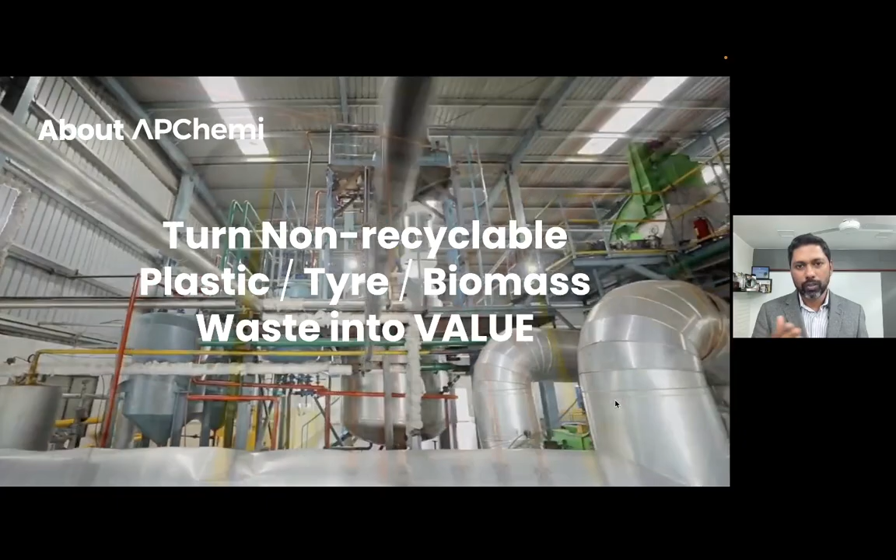About my company: we are APChemi, or Agile Process Chemicals. We are leaders in pyrolysis. We turn non-recyclable plastic, tire, and biomass waste into value. These are the visuals of the projects that we have developed and the field in which we are working. We have developed 47 pyrolysis plants since 2007 to process plastic, tire, and biomass. We are supported by Shell Petrochemicals.

We recently raised $2.4 million in collaboration with Aalborg University, Denmark, to convert plastic waste and biomass waste into green hydrogen. It's a 3-year research program that we are working on in collaboration with Aalborg University.

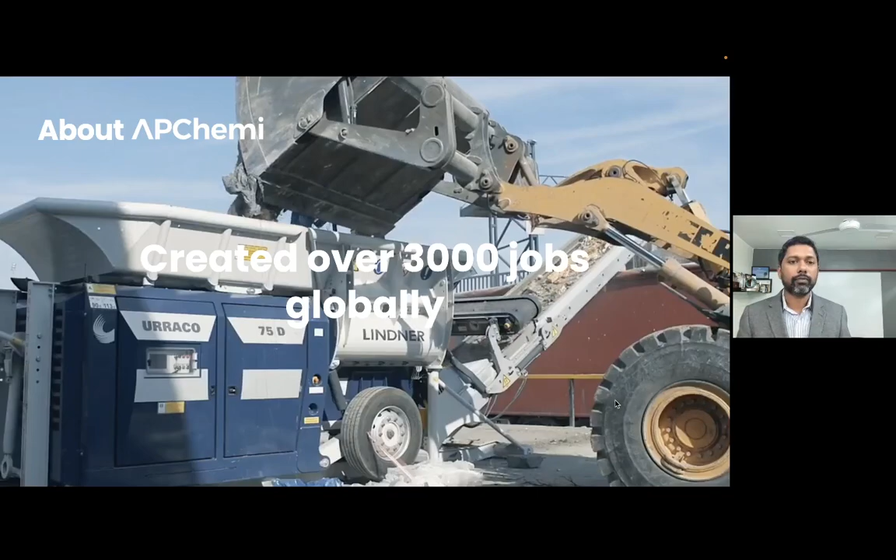We are working on global projects of converting plastic, tire, and biomass into high-value products. In Europe, we are working on a 240 metric ton per day pyrolysis plant. Recently we completed a 42 metric ton per day pyrolysis plant engineering assignment planned to be deployed in UK. Projects that we have done till now have generated over 3,000 jobs globally. Recently, we have generated over 7 proof of concepts on how you can start with this kind of end-of-life plastic waste and produce chemically recycled or advanced recycled products using this kind of technology and machinery.

We offer award-winning solutions to accelerate plastic circularity and decarbonization. We have won the Indo-Danish green hydrogen funding call for conversion of plastic into hydrogen. Our technology has been recognized as a circular disruptive technology for managing plastic waste. A couple of years ago, we won KPMG's Enrich Award for ready-to-scale startup.

We have an exceptional team. I'm very proud of my team. I have 12 years experience in this domain. Aruna heads operations with 10 years experience at Tesco as well as Maersk in operations. Sanam has experience of developing over 50 pyrolysis projects with us. We have the right set of advisors, and together as a team of 20, we have 310 years of combined experience in pyrolysis and oil purification. We are united by a common vision to engineer plastic circularity.

Our team goes beyond our in-house team. We have collaborated across the world with global corporates, academia, as well as leading platforms that are working in the domain of plastic circularity and decarbonization.

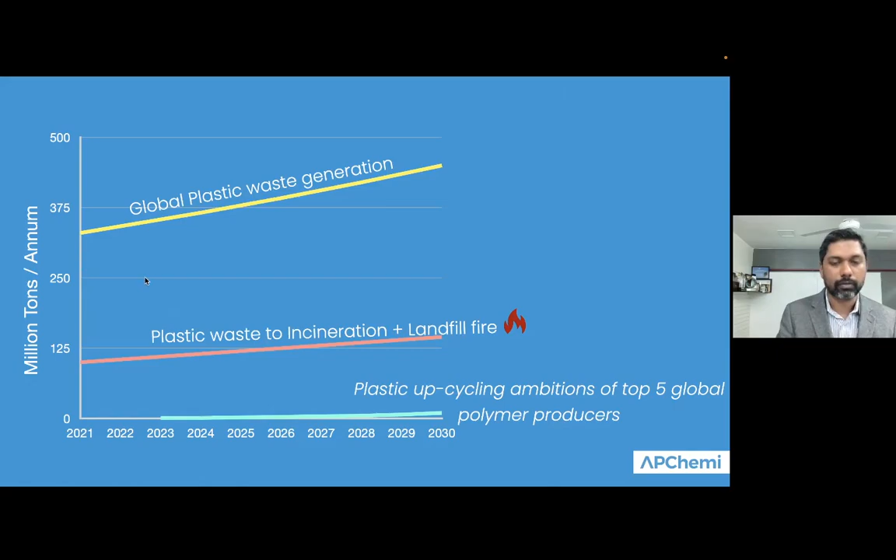Even if you take this plastic waste and convert it into plastic oil or pyrolysis oil, this pyrolysis oil has impurities, so it cannot be used back for production of polymers, and that's why there is a dependence on crude oil. So you can see this is very much a linear economy, not a circular economy.

It's not a circular economy - crude oil to polymers to FMCG to plastic dumping or burning. It's a linear economy; there's no circularity. That's because impurities in plastic waste stop the circularity of carbon in the plastic waste.

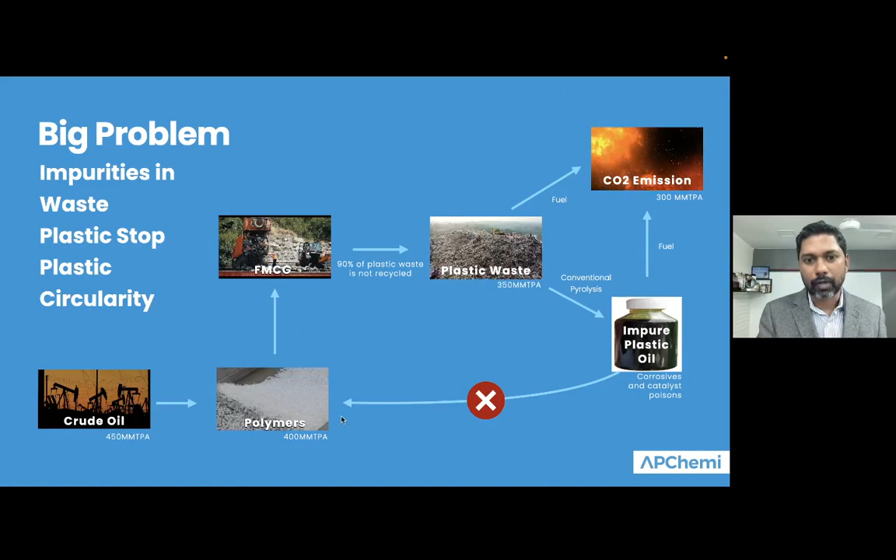The way APChemi technology solves this problem is we can convert plastic waste into purified pyrolysis oil, a PUROIL which is a very good feedstock to be blended with crude oil naphtha for production of circular polymers, which are food and pharma grade.

This is how we create plastic circularity. In addition, our separate technology also converts plastic into bitumen for road construction, capturing the carbon from plastic waste into bitumen in the road - not only capturing it into the road, but also without any microplastic pollution.

We have another technology that even if plastic is converted into contaminated oil by somebody else, we can purify that oil so it becomes pure oil and can be blended with naphtha for production of high value food and pharma grade circular plastic. This is how we upcycle end-of-life plastic waste into circular PUROIL and bitumen.

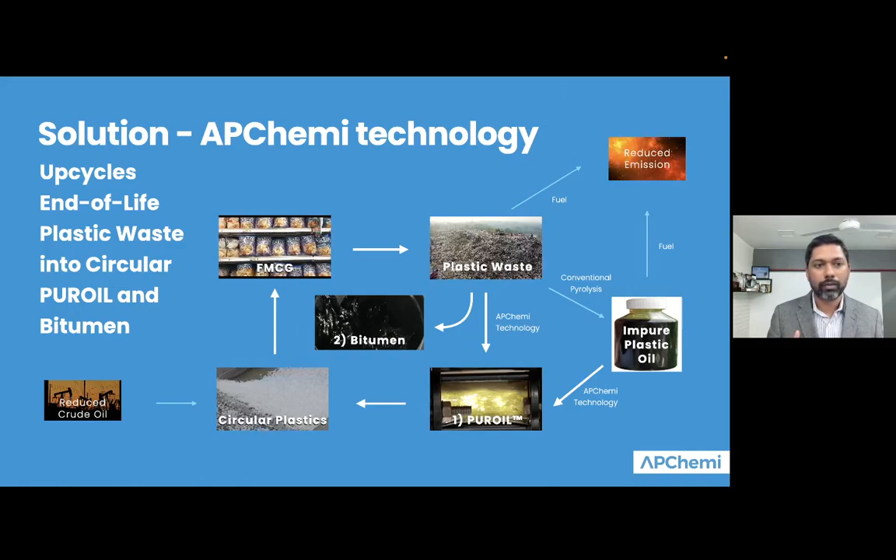Our core value is conversion of waste or impure oil into purified oil. Our pyrolysis oil purification technology has lower capex and opex, removes more impurities, and has a lesser carbon footprint compared to other technologies for purification of pyrolysis oil, like distillation, adsorbents, or hydrotreating.

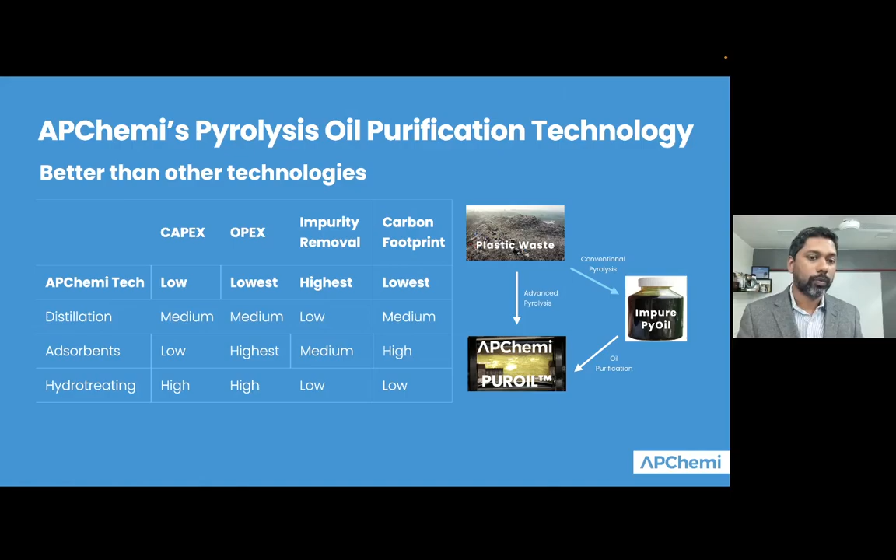Our pyrolysis oil purification technology has high purification efficiency. The core problem of impure oil or even plastic waste is chlorine impurities. Our technology removes 99.7% of chlorine impurities and very high quantities of nitrogen, bromine, fluorine, oxygen, silicon, acidic, metal, and heavy metal impurities - this is what makes our technology really usable for contaminated plastic waste.

If you have plastic waste with polyethylene terephthalate contamination, PVC contamination, even multi-layer packaging, all that can be processed through our technology for production of very good quality oil that can be used as feedstock for production of circular plastics.

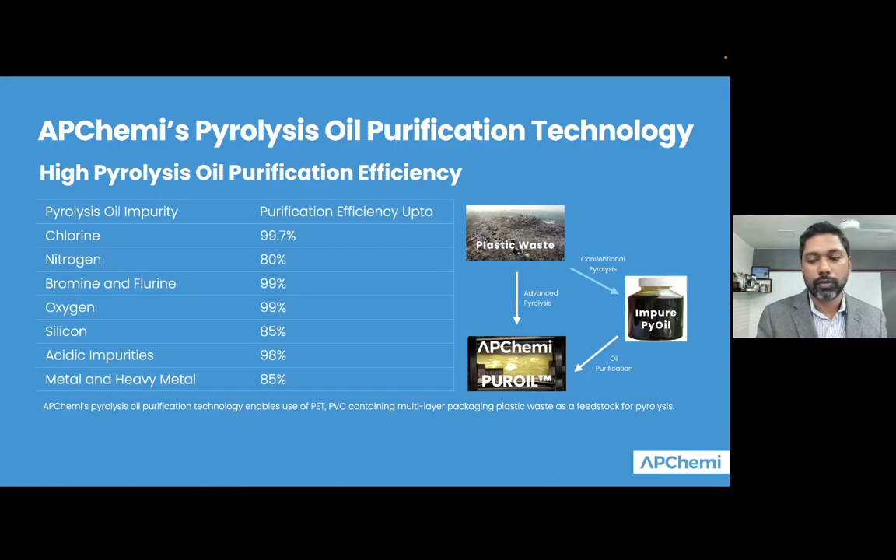We have validated our proof of concept and technologies. We have received written letters of intent from 8 global corporates, including BASF Germany, Shell Singapore, Unilever Global, PepsiCo Global, and so on. We are not only producing purified pyrolysis oil, we are also creating the much-needed cross value chain collaboration between FMCGs and packaging to accelerate plastic circularity.

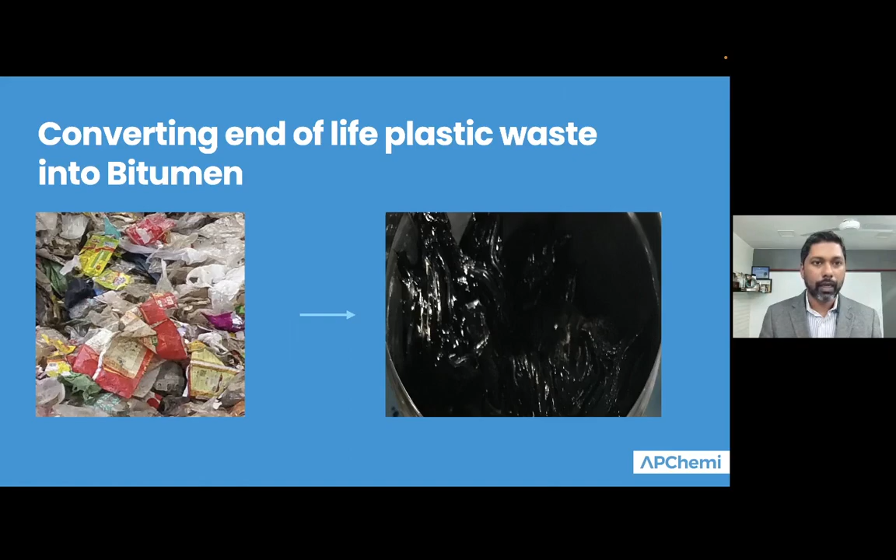This other technology that we have, as we mentioned, is converting end-of-life plastic waste into bitumen. The advantage of this technology is that this sustainable bitumen produced from end-of-life plastic waste can be blended up to 20% with conventional bitumen.

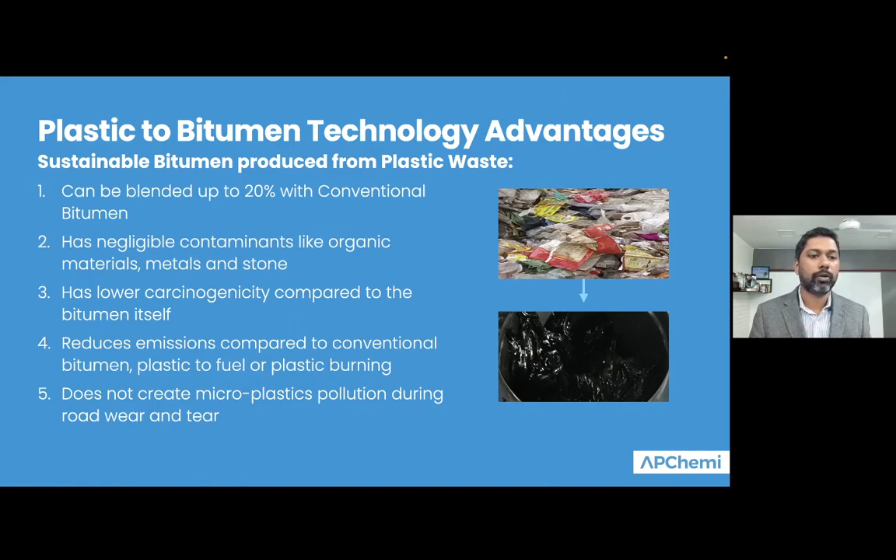It has negligible contaminants like organic materials, metals, or stone. It has lower carcinogenicity compared to bitumen itself. It reduces emissions compared to conventional bitumen or plastic-to-fuel or burning of plastic waste, and it does not create microplastic pollution during road wear and tear. So these are the advantages of our plastic-to-bitumen technology.

Looking at the advantages of pyrolysis and oil purification technologies, our technologies are safe and energy self-sufficient. We have a lot of energy recovery that happens in these technologies. In pyrolysis technology, we have done more than 47 projects, so we have a huge track record of these technologies, with 340, 330 days of uptime. It's a patented technology that also reduces the carbon footprint.

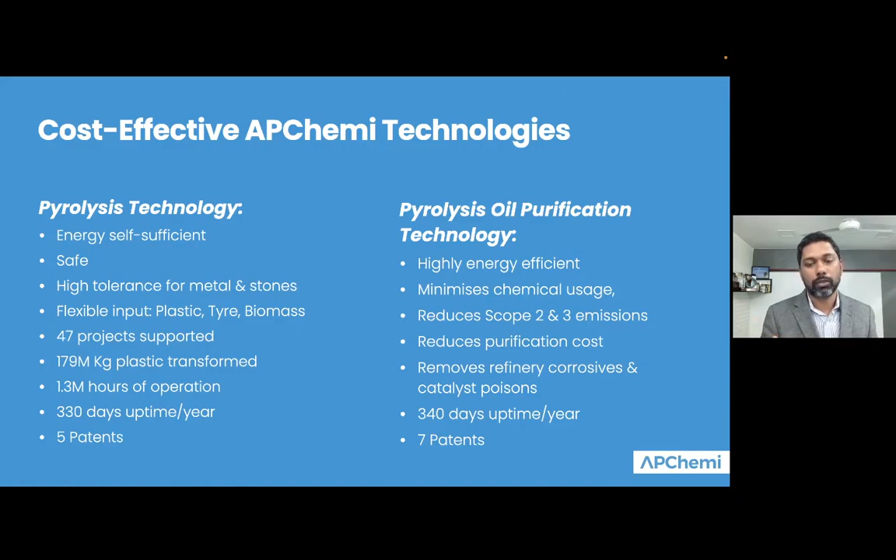We are able to remove impurities from pyrolysis oil as part of our oil purification technology, and this ensures that purified pyrolysis oil can go for production of circular plastics. Our pyrolysis oil purification technology also reduces the use of chemicals for pyrolysis oil purification, and thereby also reduces the scope 2 and scope 3 emissions involved in advanced recycling of plastic waste.

So looking at the carbon footprint numbers compared to, say, burning of plastic waste in landfill fire or incineration plants, our technology brings down the carbon footprint by 50 to 75%.

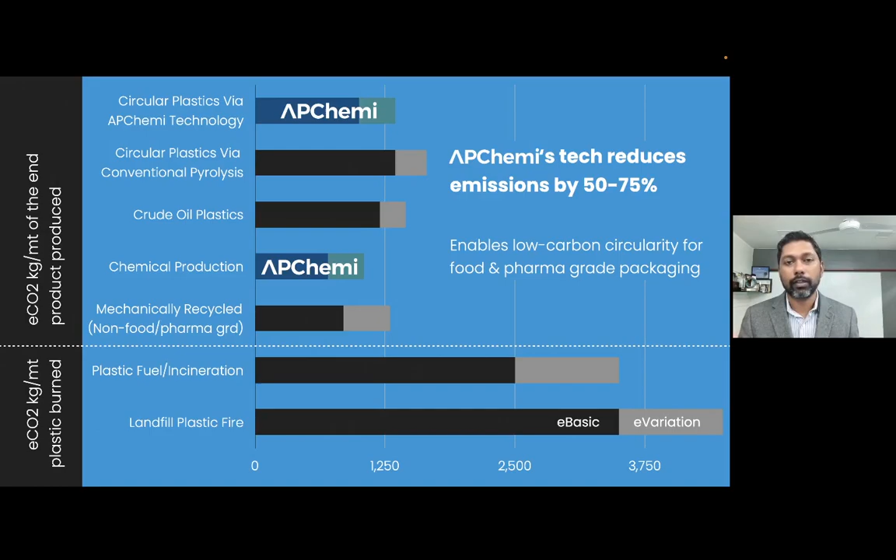Compared to conventional pyrolysis and purification of pyrolysis oil, our technology is able to get the job done of producing purified pyrolysis oil at around 20 to 30% lesser carbon footprint, because we actually reduce the use of chemicals in pyrolysis oil purification.

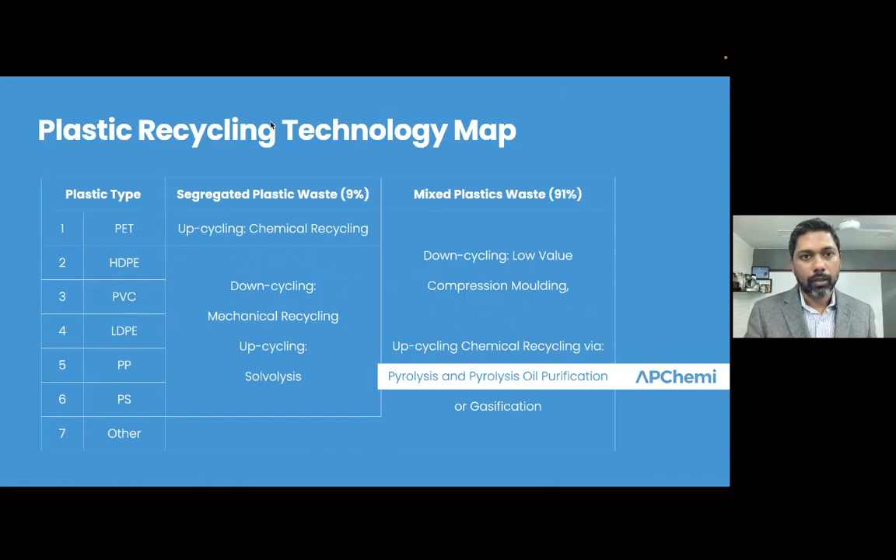Now let's look at the market situation and the engagement process that is required for using these advanced recycling technologies for cost efficient recycling of plastic waste. It's a sunrise market to begin with.

Recycling market based on pyrolysis is expected to grow to $100 billion by 2030. As per McKinsey and Company, legislations are growing the profit pool of the recycling industry, and pyrolysis itself is expected to contribute $25 billion to the profit pool of the recycling industry by 2030. There's a $500 million plastic tax looming over FMCG and packaging, and legislations like those in European countries are being copied across the world, such as recycling targets, plastic tax, and extended producer responsibility, and this further boosts this market every year.

Now looking at a global challenge, this is an important concept we need to grasp: even though the core of mismanagement of plastic waste, like 99% of mismanagement of plastic waste, happens in Asia and Africa put together, still 99% of investments in plastic waste management happen in Europe, USA, Canada, and Australia put together. So there's a huge disconnect between where the plastic waste management problem is and where the investments in managing plastic waste are.

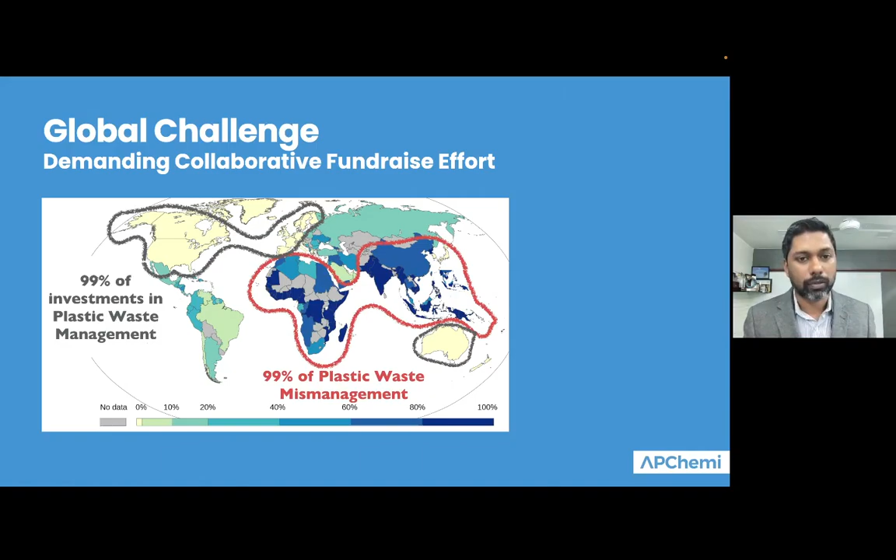Now, how do we attract investments in advanced recycling of plastic waste? It requires cross value chain collaboration, and this collaboration has to be between the players that are involved in plastic circularity.

So let's say plastic is used by FMCGs, that goes to consumers, then consumers give the plastic waste to city councils. City councils appoint the material recovery facility contractor for segregation of plastic waste. That segregated plastic waste has to come to a plastic pyrolysis plant, which converts plastic into oil. That oil has to be purified, and then purified pyrolysis oil has to go to monomer production. Monomer producers don't usually produce polymers, so they hand over the monomers to polymer producers, who produce the polymers that go to the packaging industry, and packaging gives the packaging material to FMCG. So this is the entire value chain wherein collaborations are required across the chain to make this happen.

Now, this might look very complicated because usually in business deals, so many players are not involved. However, this is what is needed, and we are demonstrating it. The earlier we get into these kinds of discussions, the sooner these kinds of industries can be developed. There's a way to build collaboration, and at APChemi, we as a company have developed expertise in building these kinds of collaborations.

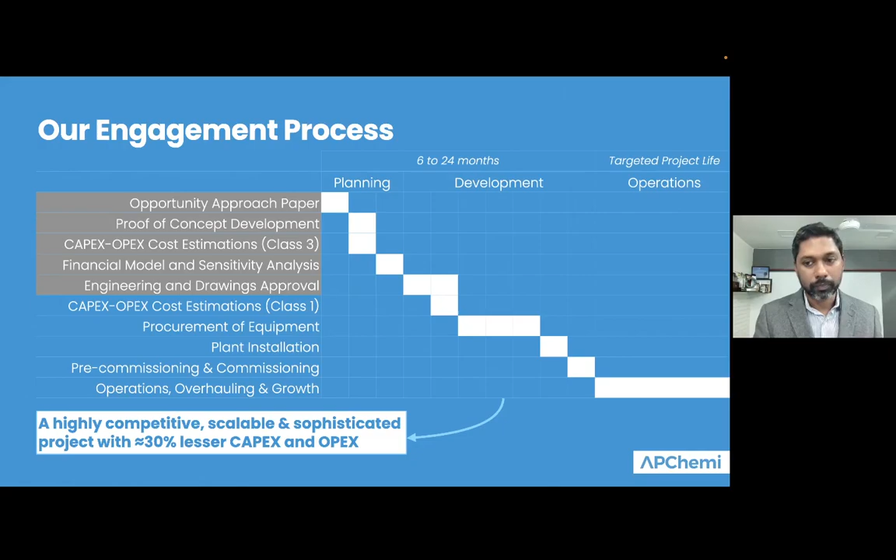So this is where we bring in a lot of strength as a company.